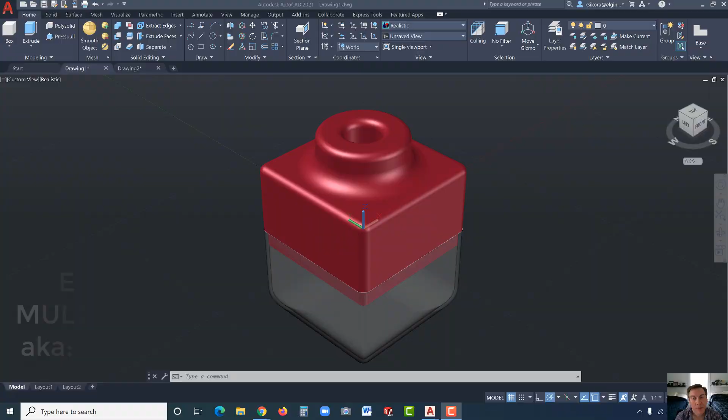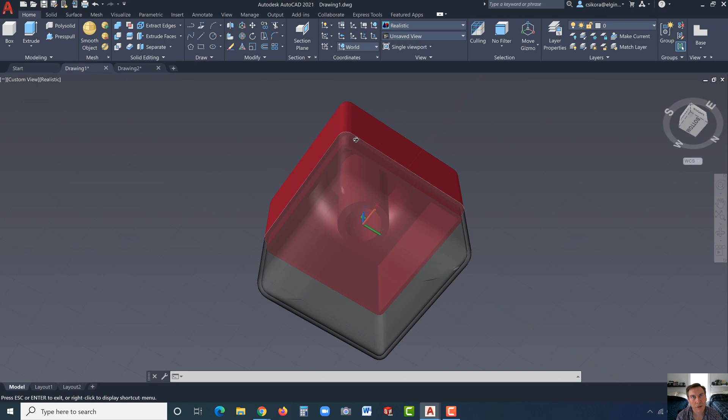I'm going to step you through AutoCAD 2021 solids working with an assembly. So basically, we're going to take a look at what you see there on the screen, which is a pencil sharpener. And as you can see here, it's shelled out. It has two different bodies. It has this clear backing. That's the reservoir for the pencil shavings, and then you have this area here. We're not going to go into the details of the blade or anything like that, but you're more than welcome to have a go with it.

And so we're going to see some different techniques. We're going to use layers in this to allow us to make those two different parts separate like that. Although you don't need to use layers, it's a good idea. And we'll generate some curves and offsets and things. So let's begin.

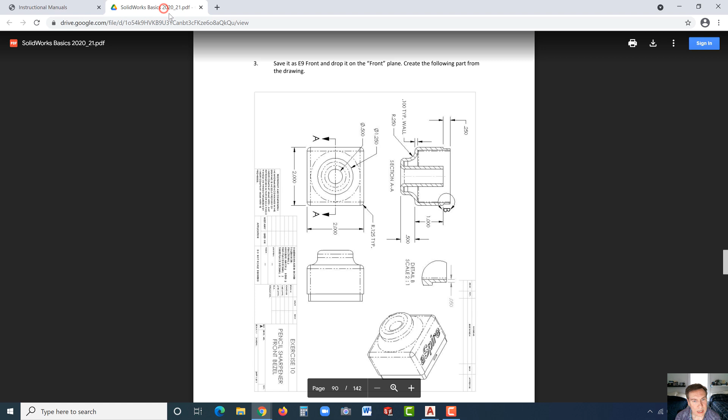As far as where to find this information, you could use the SOLIDWORKS manual or the Creo manual right here at Britannia1.com. And it's on page 90. Now I know this isn't SOLIDWORKS, but I haven't made the manual yet for AutoCAD. So we're just using this drawing out of here right now. And until I have an AutoCAD training guide up there, this is one place you can find it. You can find the same one in the Creo book as well.

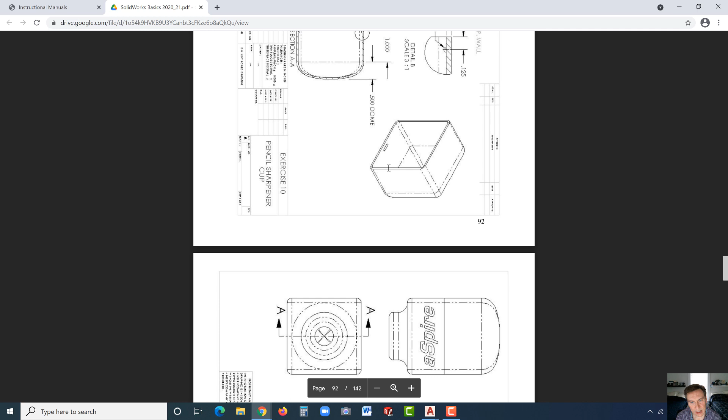All right, so you can see here's the front, and then there's the rear part as well. And we're going to see how to make that. So let us begin. Start a new AutoCAD 3D. Let's change it. I always like to start off with wireframe, and then I go to Home and click on Top.

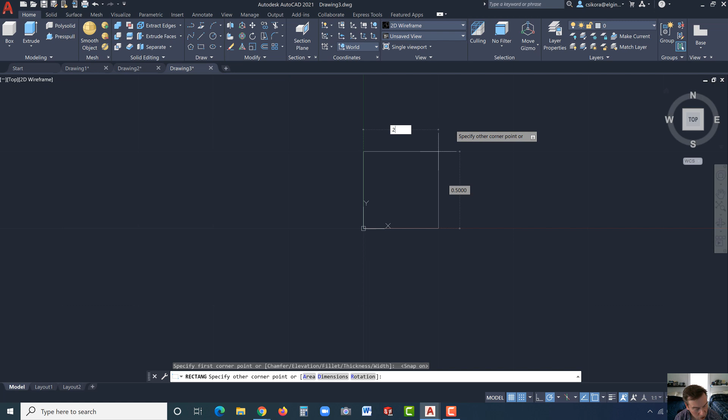Now I'm going to start off with the rectangle tool, the corner rectangle, and let's turn on the snap for just a moment here. Get to the center, drag it to the upper right corner, and it's going to be 2, and hit Tab by 2, hit Enter, and now you could click the top there, and it should center it in the screen. The next thing we're going to do is we're going to go ahead and just extrude that. So actually, before we extrude it, we'll put the fillets in.

There's some fillets that go on here, so I'm going to go with the fillet tool, and I'm going to set radius, and we're going to set this to 0.125. And proceed to select these corners here, hit Enter, select these two lines here, Enter, select these two here, Enter, and these two here. Now when we're hitting Enter, of course, it's just resetting it so we don't have to go to the icon every time.

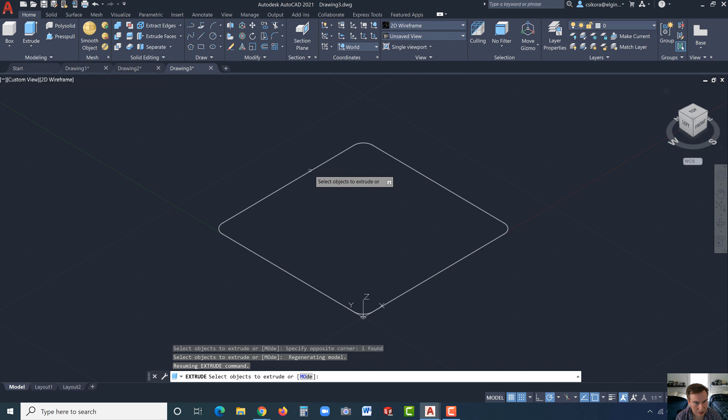All right, now I'm going to just go to Extrude. I'm going to extrude the backside first. So I'm going to click on, just select the geometry like that. I'm going to go to the Home button so we can see this. Let's click on that again, hit Enter. All right, we're going to drag that down. We could turn off the grid temporarily there, and this is going to be 1.5 inches. And you could click on the Home button again to center it.

All right, next what we're going to do is we're going to put some fillets in at the bottom. So let's go to the solid fillet. We're going to put nice rounds on that bottom so that it doesn't hurt the hand as it's held. All right, and now we're going to go with a loop. And I'm going to go ahead and we'll do chain. Select this edge here. And we actually want it to be the radius of 0.5.

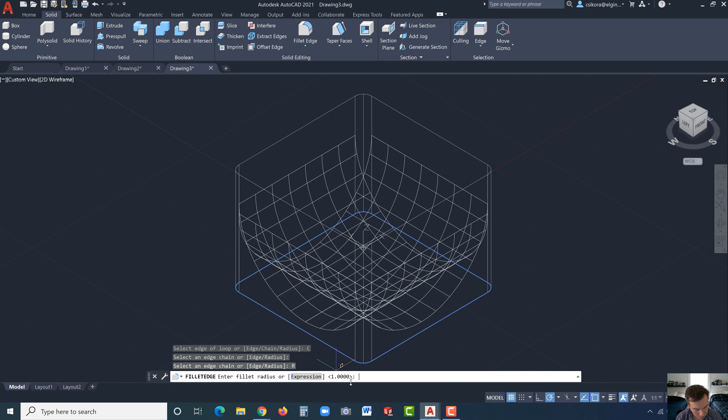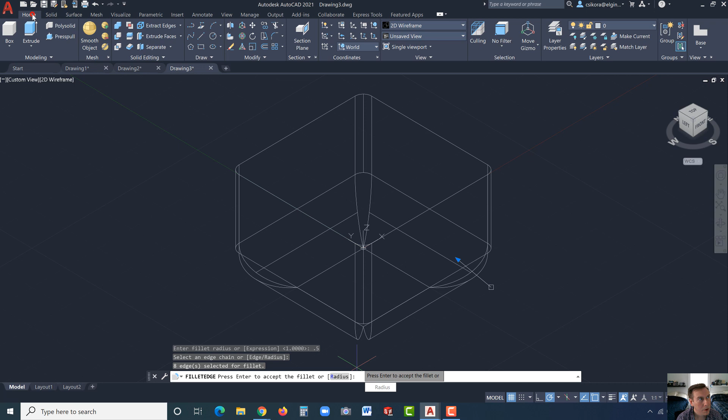And hit Enter. Now you might notice in previous videos I wasn't aware of the loop option. I noticed it, I just had never really used it much. So there we go. All right. Now we could go back to Home, the Home tab, and let's just change this to shaded gray. All right, and unfortunately I must have neglected to hit Enter, and that's the problem sometimes when you don't see this. I'm going to hit Enter again.

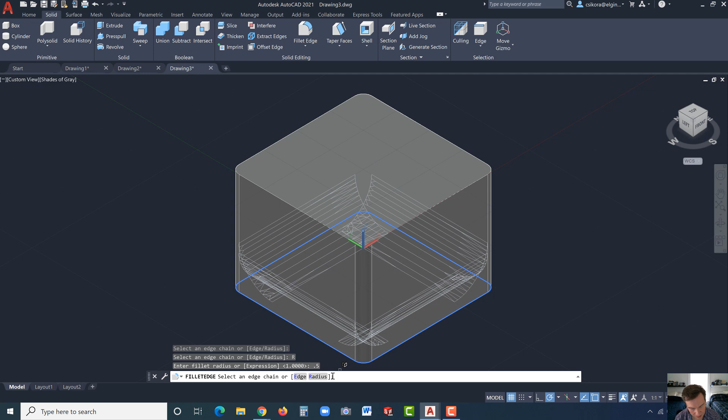Actually, let's just go back to fillet, solid, fillet, loop, chain, and we'll put in 0.5, Enter, select the bottom edge, let's get that in there again, 0.5, Enter, Enter, and enter. Forgot to hit enter the second time. So that's a good example.

I leave those errors in because they're very common amongst us to make those. Most likely, I've learned over the years of teaching, you might make the very same mistake I do. So it's good not to edit it. A lot of my videos, I rarely edit. Mistakes and all are in there.

Okay, now what we're going to do is start some layers, and we're going to put this on a different layer. So I'm going to go back home here, go to layer properties, and hit new. That's that little star there. And under layer here, the first one, we're going to call this rear, because that's what we're making right now. And then we could go to color, and let's make that like a pale blue.

All right, you're not going to see it on here because we're in the shades of gray mode, so it removes the colors, but later on we'll see it. All right, now let's go to new again, and we'll make a front. And then for that, click on this, and you can make it any color you like, really. You notice I had red. I'm just going to drag this down. Let's go with red again.

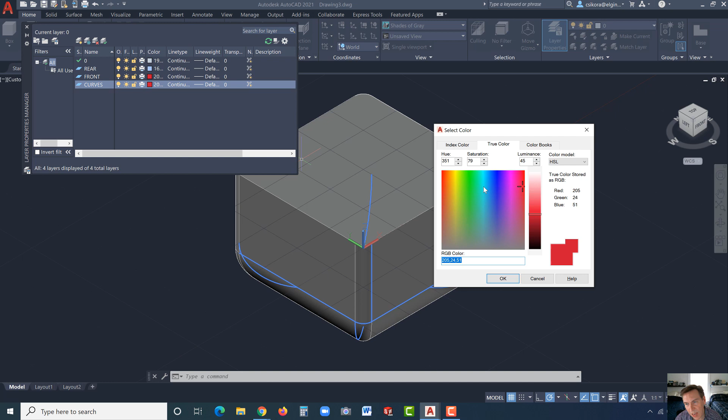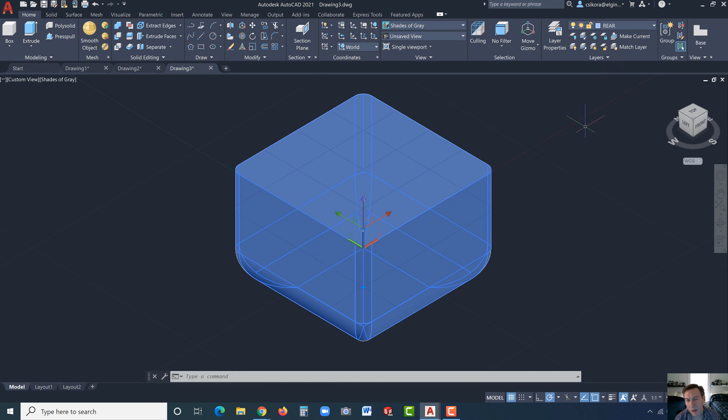All right, and I'm going to make another one, and I'm going to call this curves. So any curves I could just drop on that layer. And then for that, I will just leave it like a blue of some sort. Okay, so now we could just close that up, hit escape, click on the model, and then let's just go up here and drop it on the rear. And enter. Okay.

Now if you want to verify that, we could always click once on here, and you'll see by layer, and you can see the color is that light blue, and the layer is set to rear. Now we're going to make the other part here. So let's go ahead. We're going to steal those edges again.

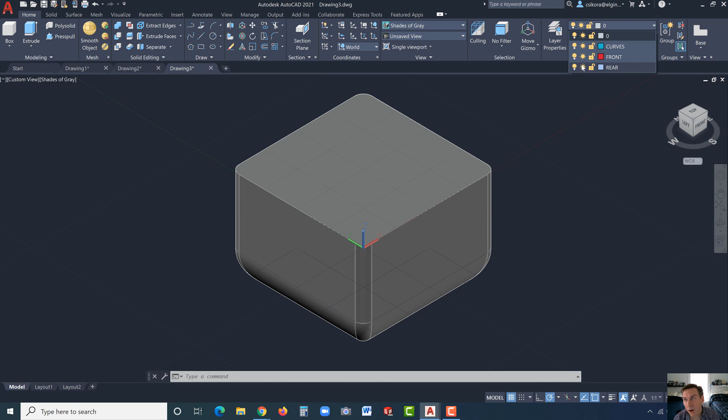And so for that, we go to solid, we go to extract edges, and make sure on your filter you set it to faces, because we just want to steal this one face here. Select this face, hit enter, and it extracted the edges for that. We could hit escape. And let's go to home here, and we're going to hide our rear part. So click on this little light bulb here. And so that's on a different layer.

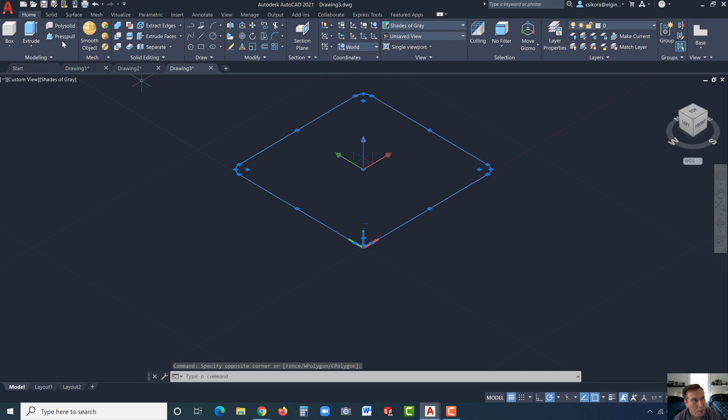We just hit it. Okay, and now we could actually put these curves on, but once we extrude it, it doesn't matter. We could use press pull. And as you might see here, let's go to the filter. Oh, it is set to no filter. Let's see if we could just select the whole thing as a group. And press pull. There we go. Click and drag that up.

And we want this to go, well, let's look at the training guide really quick here. So we're making the front cover. So it's going to be 1 inch thick. Type in 1, hit enter, and there we are.

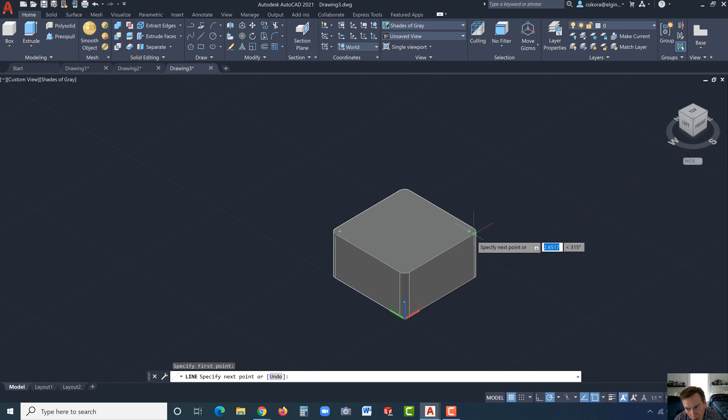Now let's go to the line tool here, and we're going to draw from this corner here diagonally across. Now look, I'm going from opposite corners. I'm going to go to this corner of that fillet and then hit escape. So can you see it's from that corner to this corner. Now the reason I did this is so we could center the post that goes on there.

So we're going to go to center diameter, and we are able to find the midpoint. Now if you're not able to find these, remember there's the snaps, and you could set center and midpoint. You might have to set midpoint up if it's not turned on. So those are some of the things I have set there.

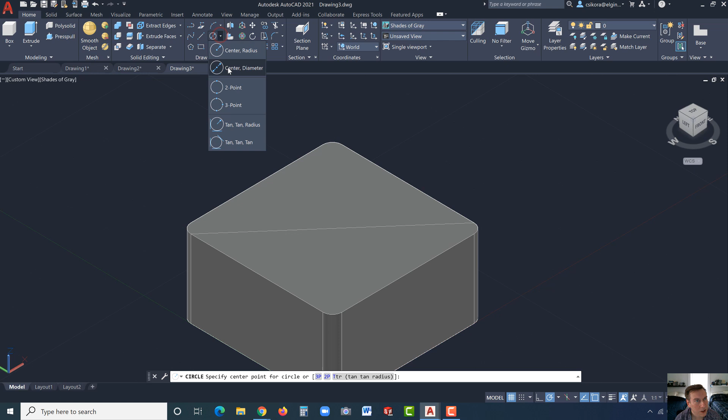Okay, so we just want to make sure I got center diameter there. Go to that midpoint, click, and drag this out. And this first diameter is going to be 1.25. Now, I notice when I hit enter here, something strange happens as far as the diameter, so I'm going to select it again in hopes that I don't get that same effect, because we want to put the hole in now. So let's go to that midpoint again, center, diameter, and this one is 0.5.

Strange, when I hit Enter like I normally do to repeat the last instruction set, it makes it twice that size. So it does something a little strange there, almost like it unexpectedly doubled it. Not sure why. Anyhow, now I'm going to go ahead and do the press-pull.

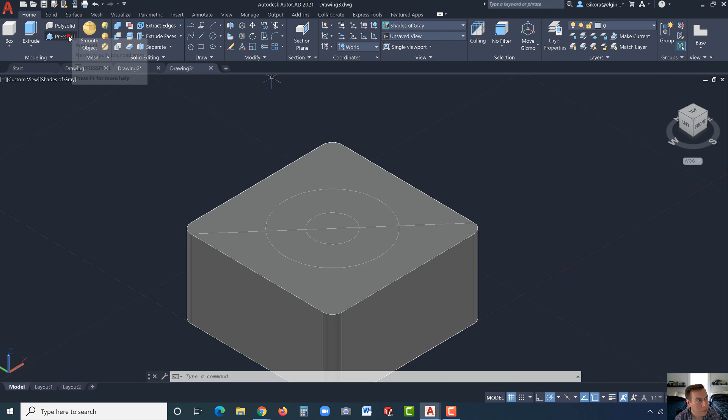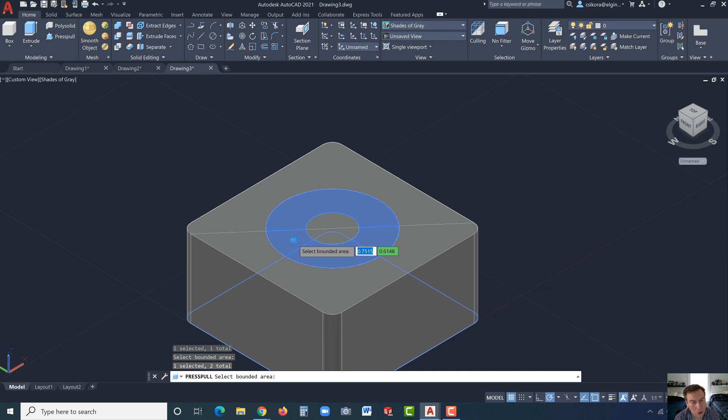Now if we want to select these two items here, we could delete that center line, but we could leave it there too. Watch this: hold Shift, click on this one, and then while still holding Shift, select this one too, so you can select multiple areas.

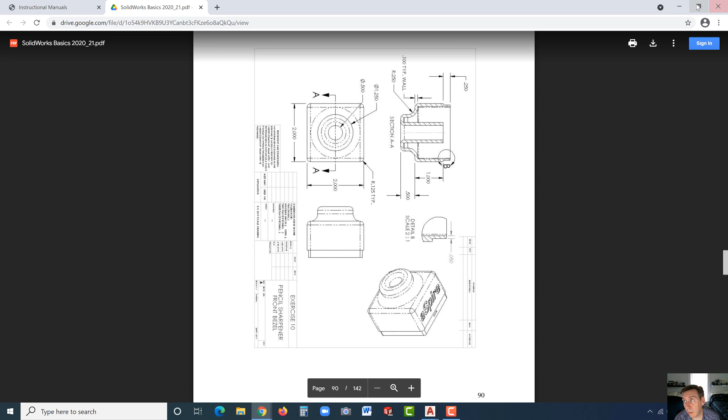Now hit Enter, and you should be able to drag it up. Now there's a line, a cross-sectional line in there. Don't worry, that's going to disappear in just a moment. And the height of this is going to be 0.5. So 0.5, hit Enter. All right.

Now we're going to go ahead and put in some other features here. Let's go ahead and put the fillets in, so the rounds or fillets. Let's go to Solid, go to Fillet Edge, go to Loop, Chain, Radius, and the first one we want is 0.25.

Oh, we really don't—actually let's put the 0.25 in last. We don't need the chain on that one, so let's put 0.1 for this. Hit Enter, and I'll select this edge here, and it should go all the way around.

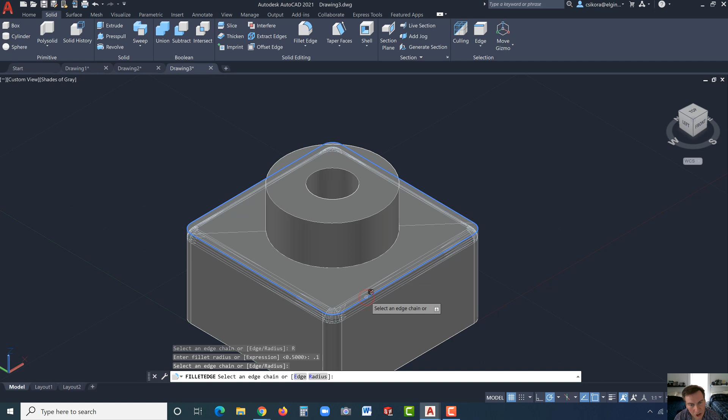Select this edge here, as well as this edge here. Hit Enter and Enter the second time. Now if we hit Enter a third time, we could go back: Loop, Chain, Radius, and this time 0.25. We didn't really need to do the chain radius for this one, just as an FYI, because it's one single edge right there. Hit Enter and Enter.

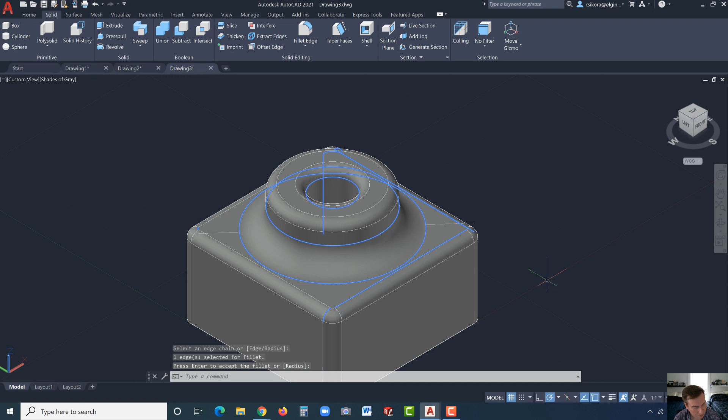And now click and then hit Escape. All right, so we've got that part done. Almost done—we have to shell these out though.

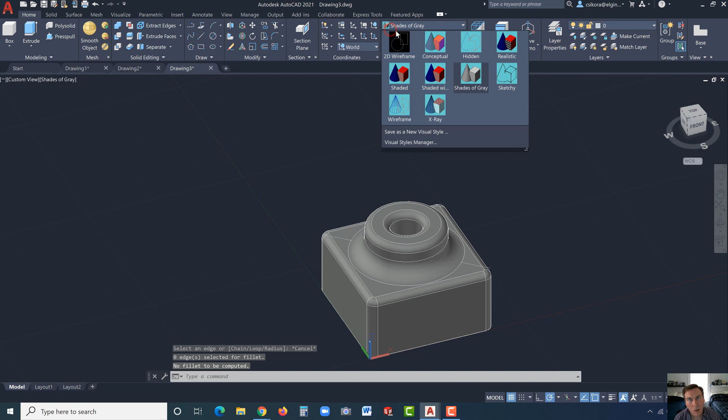Now we could actually drop this on the other layer, and that's not a bad idea. So let's go back home, click on the part, and this is going to be on the front layer. Now another way you could check this—just hit Enter and Escape—is if you go to Conceptual or Realistic; you can see the colors that appear, whatever you prefer. I still like using shades of gray. Zoom out there. All right, so we have a separate model here.

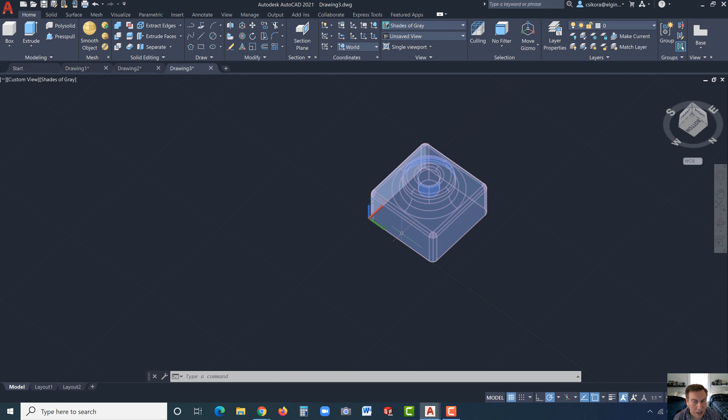Now another thing we want to do, let's rotate this around. We're going to want to shell this in just a moment, but before we do that, we want to create an offset because we're going to have a little lip that goes around. So it's going to be 0.1 thick overall, and then there's a little lip that's inside so that it could close the enclosure at 0.05.

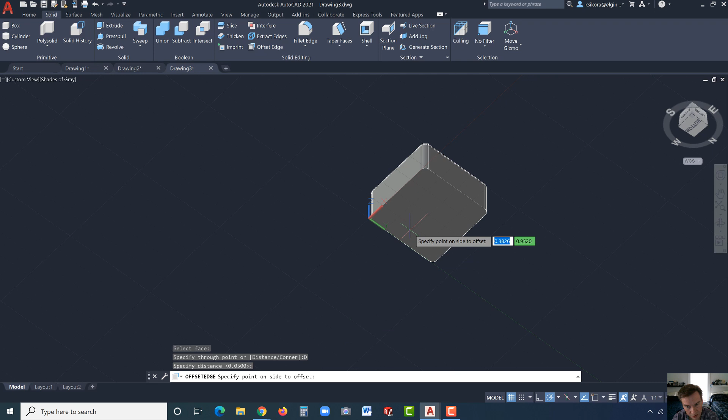So let's go to Solid, go to Offset Edge, select this face, and we're going to go ahead and select Distance, and set it to—oh, it's already set to 0.05. Make sure you set 0.05 in yours. Enter and click, and you should have a little offset edge in there. Okay, now hit Escape. We used the offset tool before in exercise 3, so if you ever need to go back and see how that's done, you can do it here or there.

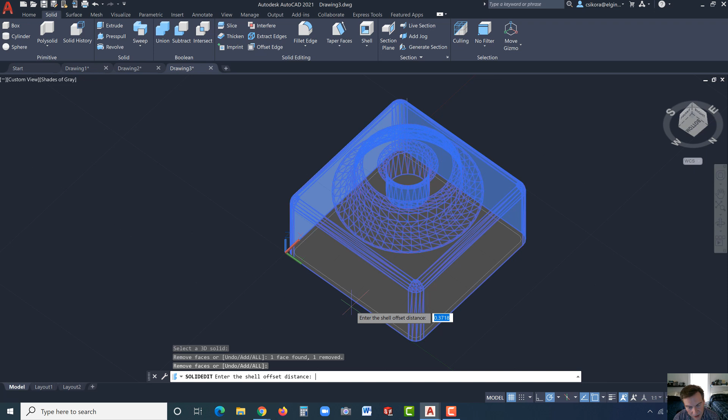All right, now we're going to go ahead and shell this. So let's go to the Shell command, and for the overall shell, I'm going to select the solid, select that back face that we want to remove, and put in—oh, actually just hit Enter—and now you could type in 0.1, Enter, and just hit Exit, and Exit.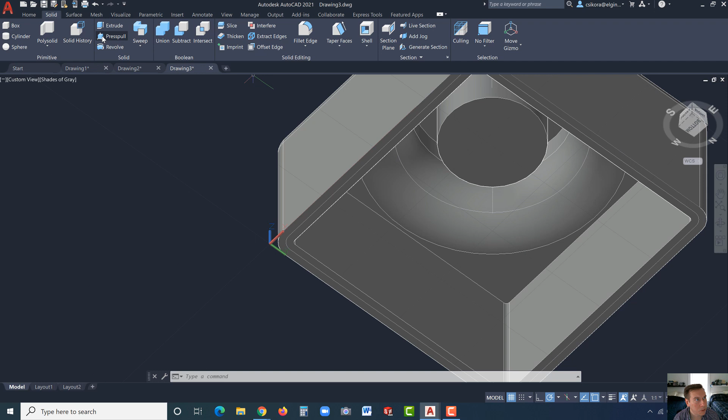All right, now you could see our plan of attack there. We wanted this offset edge. So what we can do now is go to press-pull, get inside there, and see when both highlight, click and drag that out, 0.25. So we've added that offset feature specifically so that the glass backing will snap on there.

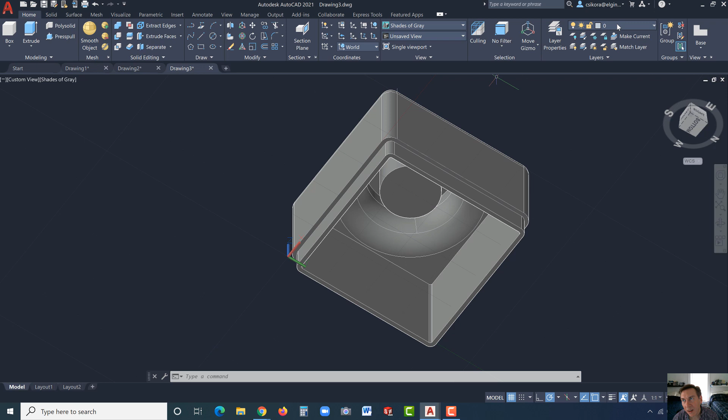All right, now let's bring back that other model. Go to Home, and over here in the layers, click on Rear. We could actually hide the front—click on the light bulb to hide it, just temporarily. And flip this around. Now we're going to go back to Solid, go to Shell, and let's go ahead and select this and select that face.

Oops. Let's try that again. Shell.

Okay, let's hit escape. All right, let me try that one more time. Let's just go right to shell.

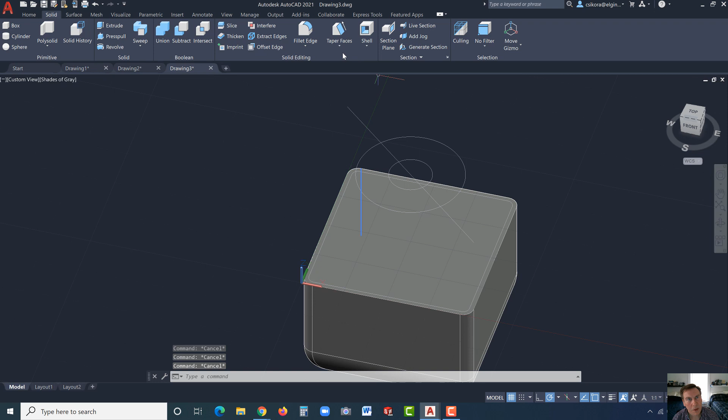Select the solid, select that face. There we go, okay, that's what we wanted to see. Remember, the faces that are gray are the ones that are selected.

Hit enter again, and this is only going to be 0.05. Now remember, when you're designing plastic parts or steel for sure, you have to make an additional offset, so it might actually be 0.045 or something like that. You need a little bit of clearance. Plastic, sometimes you could get away without that because they're flexible, but steel, aluminum, no.

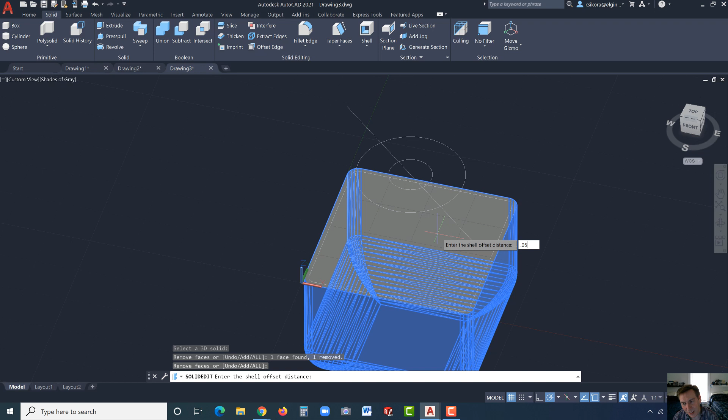You always have to put what they call clearance or tolerance between the two. But this isn't a class about that, this is just about AutoCAD. So we're just putting in 0.05 to make it line to line, but just remember, in real world, you don't usually do line to line. Hit enter and hit exit, and exit here.

All right, let's go back home. Let's go to the layer properties and let's hide the rear. And I want to drop all these onto that other layer.

I'm going to go ahead and click here and drag a fence around all the curves, because now some people just delete them. You don't really need to keep them, but I like to keep them just because I might want to use them again for something, and they don't take up a whole lot of space if they're this simple.

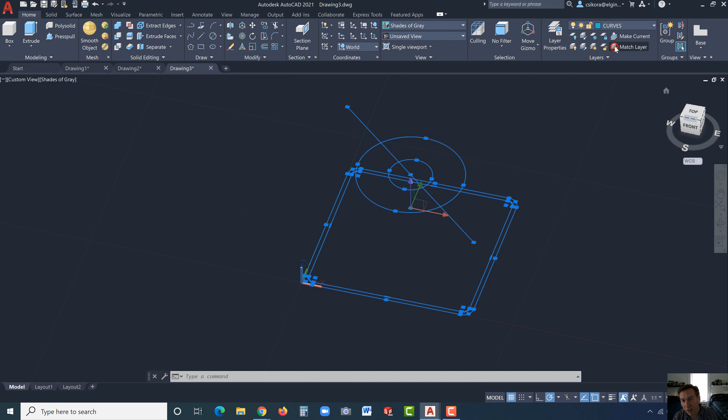All right, so I have those selected. I'm going to go to the layers and select the curve layer to drop those on. I can hit escape, and I could hide that curve layer, and we could show the front and rear.

And now let's go over here to realistic. Now, if you want to give this a realistic appearance, so it's transparent, there are some options.

What you could do sometimes, once you've applied something, you could right-click and go to the properties. And you'll see here by layer - right now I don't have an option, but let's give it some options there.

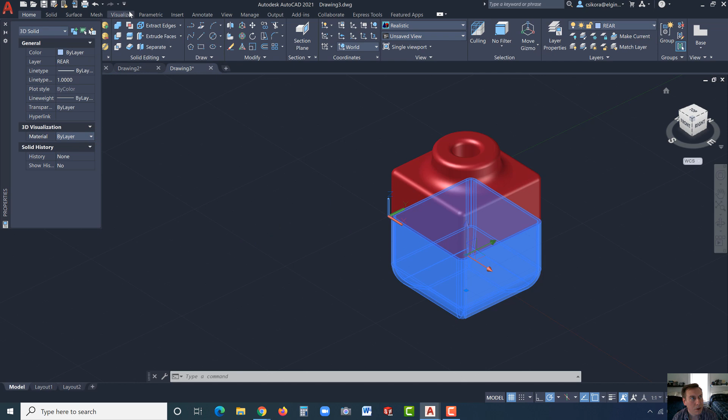So with that, go to Visualize, and we're looking for Materials Browser. Now, what you can do is find a particular material, like we're looking for glass. You could also type in a search and it will bring up the glass, but hit the little plus symbol next to glass - actually, just click on it, and you'll see there's different types of colors of glass and such.

Now here is a clear one - make sure sometimes you have to read what it says and wait. So I'm going to go with that one. I'm just going to click on this little Add Material.

Now, you can add it to individual faces by clicking on it and then holding the Control key. Let's try that again, and drag it over. Forget if you have to hold Control first and then click - yeah, hold Control down, then click. And watch this, you could release the mouse button. I'm just holding the left mouse button, and it just applied that material there.

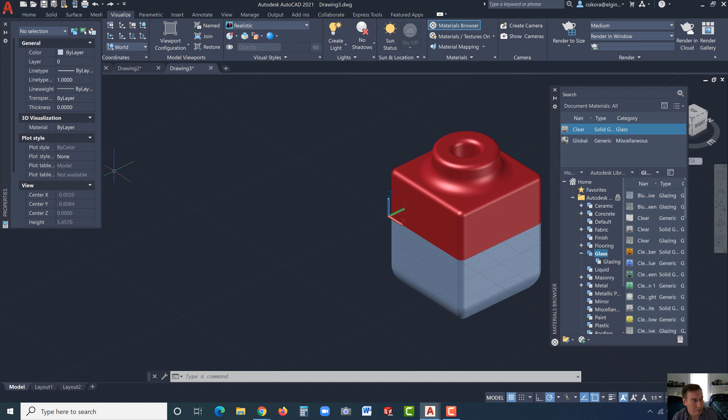I'm going to hit Control Z, which is undo, because I don't want that. But let's do this - I want you to right-click on that clear glass and select Objects Applied To, and select this bottom part. Now over here, remember we had that by layer, you can see clear.

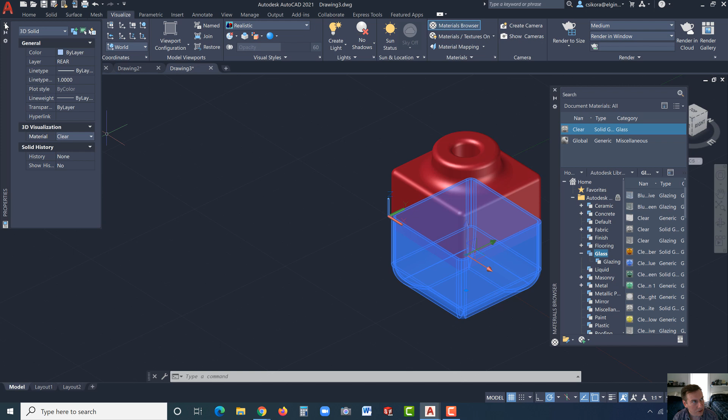And now let's close that. And again, the way you get to that one - just hit escape - was by clicking on the model, right-clicking, and going to properties. That brings that up. Now there's several ways to do this.

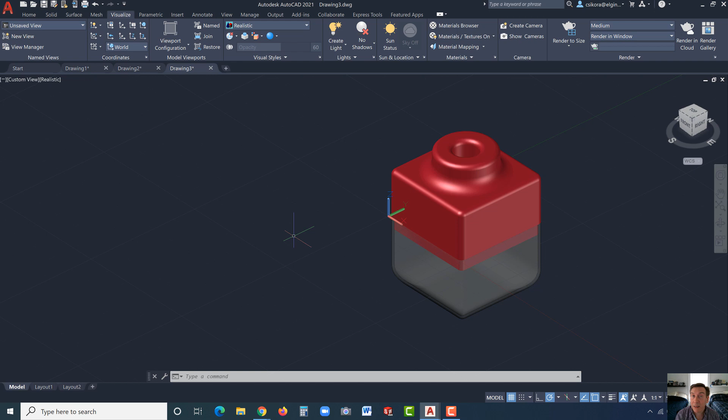I found several ways, this is just one way. It probably, I'll be honest, probably isn't even the best. Like I said in my previous videos, I learned this back in 1986. I used it on and off since then, but there are so many ways that have been added since then, or even beyond what I've learned. So if you do have any suggestions like that, please put them down in the comments below.

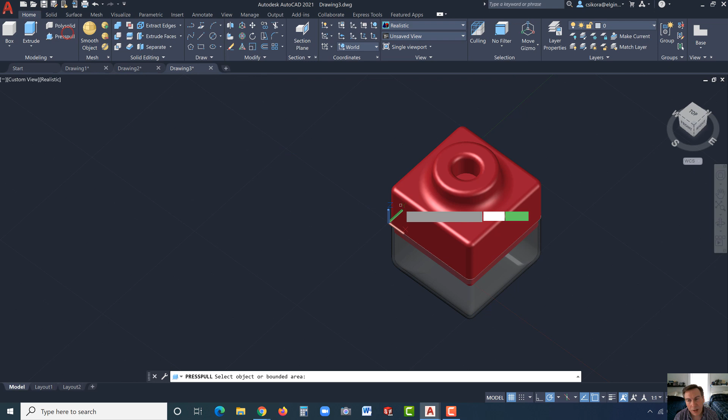All right, now you can see that we have successfully made this. Oh, you know what, I forgot to punch through the hole, which isn't a problem. To do that, I'm going to go ahead and go to Home, and I'm going to go to Press Pull. I forgot to punch this through. So I click on that face, drag it down.

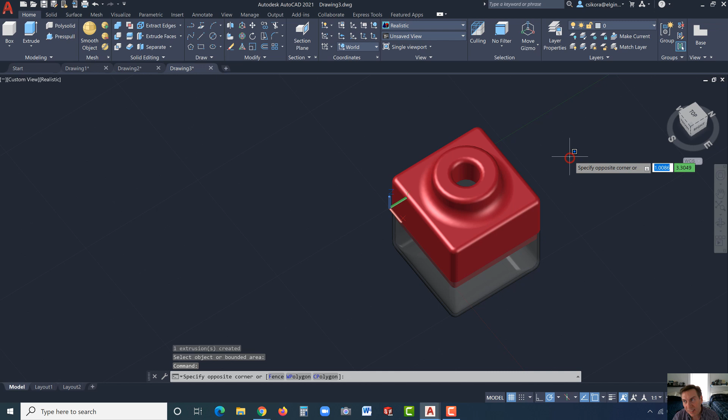Now here's the tricky thing - we don't want it to go too far. Click, hit escape, and that should have punched it through. Okay, so we have it. All right, so the hole is added, and that concludes exercise 5.